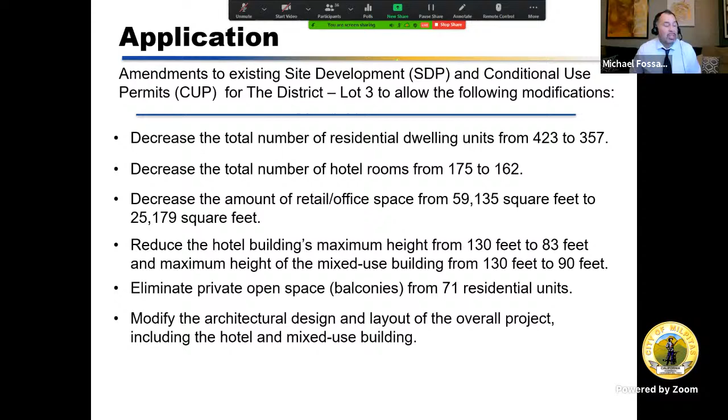This is an aerial image of the Fields site. The Fields is a mixed-use development approximately 15.5 acres in size and will host over 1,000 residential units, 90,000 total square feet of retail space, and a new hotel. The site is located at the intersection of Great Mall Parkway and McCandless Boulevard, directly south of the Great Mall.

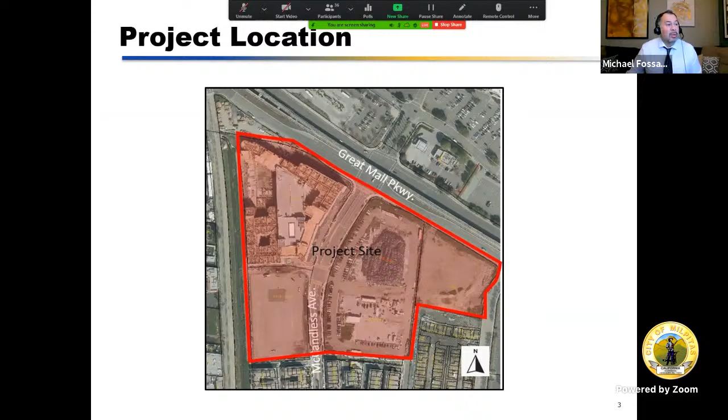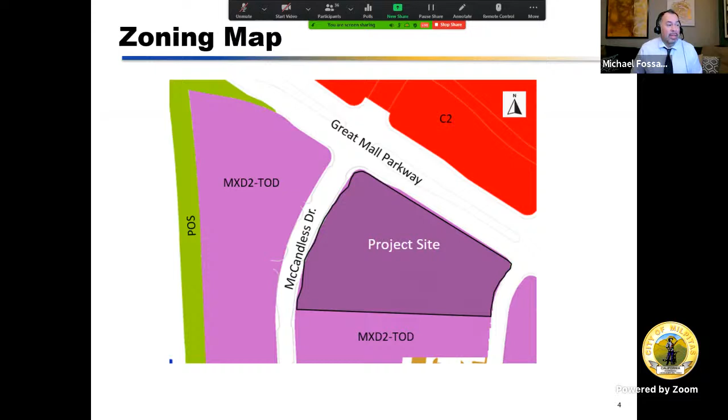This is the zoning map of the property. The project site zoning designation is very high density mixed use with a transit oriented development overlay, also known as MXD2-TOD, identified in purple. The project site is surrounded by general commercial to the north, more commonly known as the Great Mall, shown in red, as well as very high density mixed use development to the east, south, and west, also in purple. The green portion on the left is the east channel of the Penitencia Creek.

The Fields is what many consider a master plan development, with each development area complementing one another to create a high quality pedestrian friendly residential district with retail areas where residents can access personal goods and services. The city refers to the Fields development as District Lots 1 through 4. The developers refer to the Fields as 4 separate entities: Turing, Graham, Elion, and Gideon. The area we'll focus on for the remainder of this presentation is District Lot 3, also known as Elion, in the upper right-hand corner.

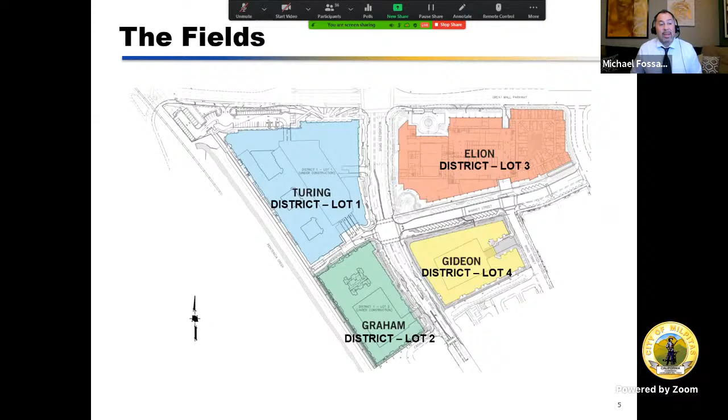The first modification is associated with removal of residential units. As discussed in the staff report, the Fields represents the mixed-use development within the district, made up of 4 separate lots, Districts Lots 1 through 4. In 2015, District Lot 1, also known as Turing, was ready to be developed. The applicant requested to remove District Lot 1 from its 2015 amendment and focus on development of District Lots 2 through 4, as well as townhome developments known as Centerpoint B and C and Huret Court. This is why you don't see the 372 residential units from the District Lot 1 project in the table; all you see is the units from Districts Lot 2 through Lot 4. Therefore, in 2015, the city approved 814 multifamily units specifically within the Fields between Lots 2 and Lot 4.

Between 2015 and today, the developer has submitted multiple applications to decrease units in District Lot 2 and increase units in District Lot 4.

In the city's view, the amount of allowable units never increased over the 814 units approved in 2015. Therefore, the discretion can remain at the Planning Commission level.

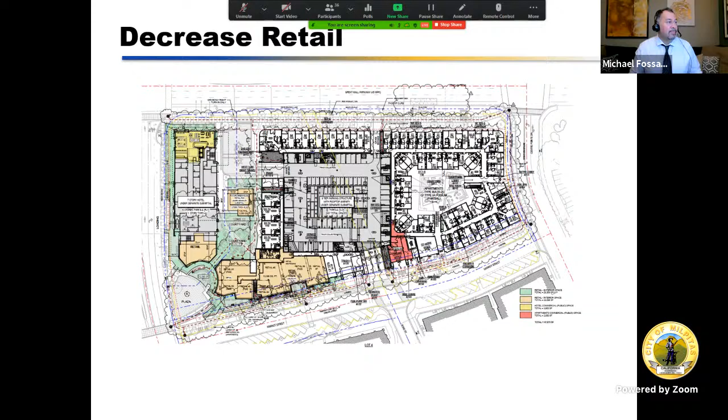In 2015, the project site was approved for a 49,240 square foot amenity area on the top floor. In 2021, the amenity area has reduced to 18,225 square feet. The reduction is allowed per TASP standards because the TASP does not have a requirement for amenity deck size.

TASP requires a total amount of open space, for both public and private. This can be satisfied through what they refer to as a park-in-lieu fee, and since this project is in TASP, it's required to pay a TASP fee. Two-thirds of that park-in-lieu fee is collected via that TASP fee. The remaining one-third of the open space must be provided, or an additional park-in-lieu fee must be collected.

The project has demonstrated compliance with private open space, as the reduced amenity deck is coupled with the ground floor courtyard. The project also includes a public open courtyard, discussed in detail within the staff report. For the record, there is a small label that states beer garden. The beer garden will require a separate conditional use permit prior to approval. This has been noted as condition number 16 within the resolution.

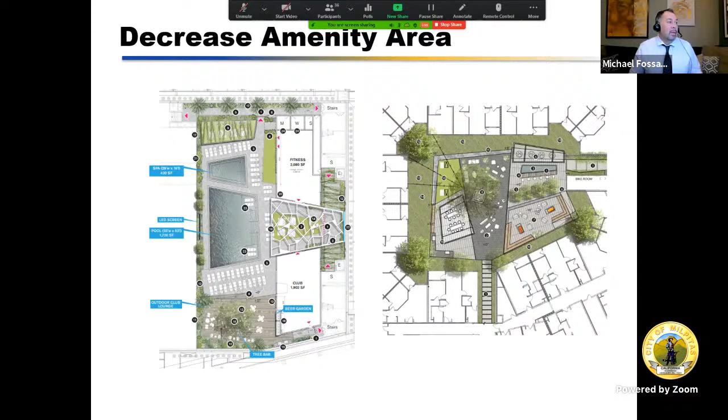This is an exhibit demonstrating the reduced height, showing the mixed-use development and hotel lowering its height from 10 stories to 7 stories. There is no minimum height limit in TASP, and the maximum height limit is 12 stories with a standard approval or 20 stories with a conditional use permit approval. Since the project's height is consistent with TASP standards, as well as complementary to the other mixed-use developments surrounding it, staff is recommending approval for this modification.

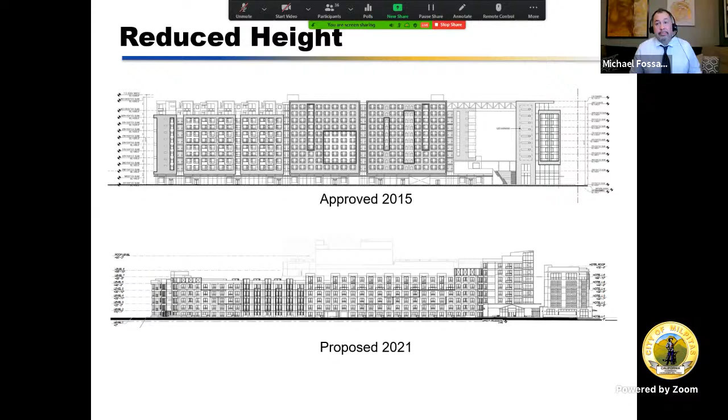The TASP requires that each multifamily residential unit have either 50 square feet of patio, assuming the unit is on the ground floor, or 40 square feet of balcony, assuming the unit is above the ground floor. Therefore, if a developer proposes 357 residential units, they are required per TASP to develop 357 patios and balconies to meet the standard. The applicant has proposed 357 residential units, but has only proposed to develop 286 patios and balconies. Therefore, the applicant has requested another exception as permitted by the TASP.

Within your packet, specifically attachment D, the applicant provides a narrative on why patios were removed. Staff can support the exception due to the additional amenities incorporated into the project, such as a public courtyard, rooftop amenity area, and urban plaza designed into this development. Additional discussion about the proposed exception can be found in detail within the staff report. Next slide, please.

We believe the most obvious change to the site development and conditional use permit amendment has to do with the architecture. The staff report goes into detail about the proposed changes, but since this is a presentation, it's much easier to demonstrate with pictures rather than words. So what we will provide you is images from six different viewpoints.

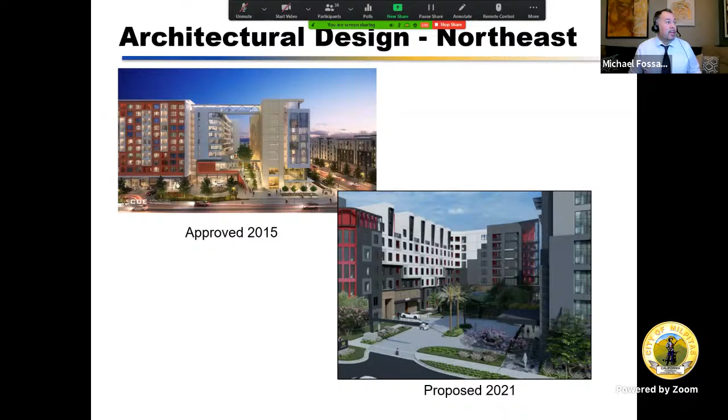This image is the rendering facing Great Mall Parkway with a focus directly on the mixed-use building. Again, imagine you're on the light rail heading southbound towards Montague Expressway, above the street. Both projects have painted plaster exteriors and vehicular access from Great Mall Parkway into the development, but the colors, architectural details, and ground floor use have changed significantly.

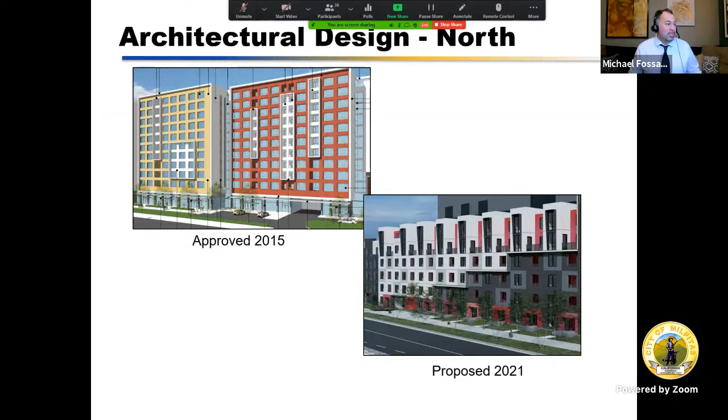As shown, the proposed building has colors that are now black, white, light and dark gray, and red ombre, meaning a very subtle transition of shades of red. Previously, windows were accentuated by square and rectangular projections. Those have been replaced with a stair-step eave that separates the darker units from the lighter units. One major difference between the existing and proposed is the loss of retail along the ground floor, which is replaced with residential units. Next slide, please.

Next slide, please. The following image is a view from the south elevation at Market Street, as if you're standing at Market Street looking at the proposed building. The city doesn't have a rendering of the approved building from its south view, but we do have a rendering of the proposed building, shown in the upper portion of this slide. The proposed design includes the same color palette presented to the north and west.

There are two additional levels of residential built above the ground floor retail and amenity areas, located approximately 160 linear feet from the corner of Centerpoint Drive and Market Street. A second vehicular access entrance and exit is proposed on Market Street, giving two ways of accessing the mixed-use development. Unlike the other slides, we've included a south elevation, which helps better explain how the project is 5 stories near Centerpoint Drive and transitions into a 7-story building with ground floor retail and the hotel near McCandless Drive. Next slide, please.

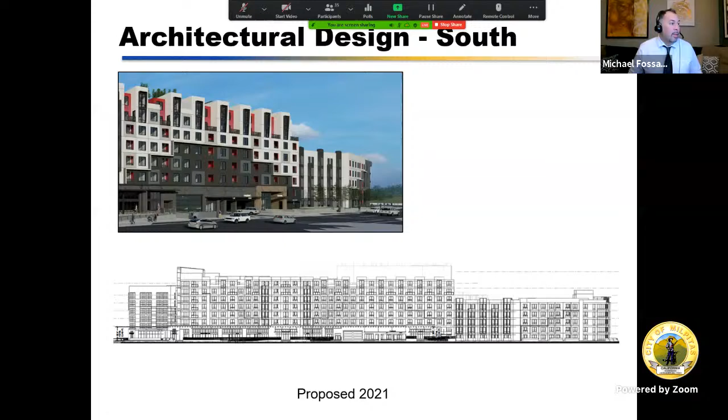This view is looking from the intersection at McCandless Drive and Market Street. The proposed elevation contains a similar sized urban plaza, a cascading water feature, and replaces the previous pond with a large grassy lawn, which also replaces palm trees and paving of the previously approved urban plaza.

The plaza will be multifunctional and can act as a small amphitheater for concerts, a place for outdoor yoga, or simply a place for public gatherings. The urban plaza is the focal point of the field's development and identified in the TASP area as a required open space area. As such, it meets the TASP standards.

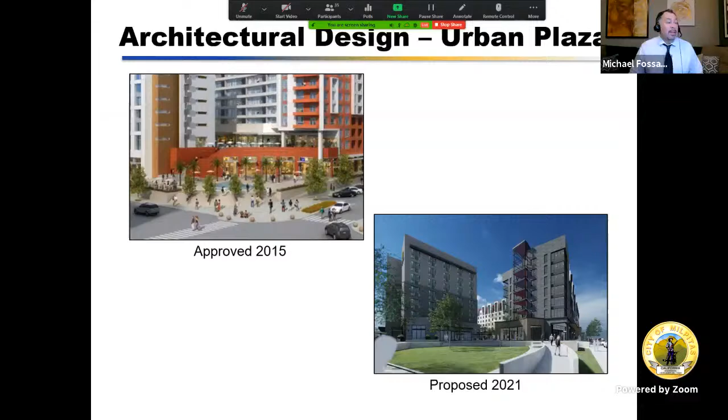The proposed west elevation is a view of the hotel located at the corner of Great Mall Parkway and McCandless Drive. The proposed hotel is 7 stories as compared to 9 stories that was approved. The color of the hotel includes light and dark gray tones, windows with black mullions, and metal awning elements held up by chains coming from the wall.

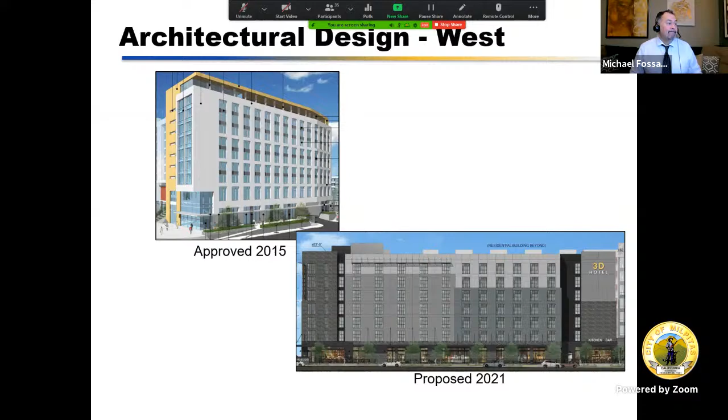As previously discussed, the project meets the standards of the TASP with the exception of retail square footage and private open space. The TASP requires 200 square feet of retail for the minimum residential unit density and either a patio or balcony for each residential unit. If those standards cannot be met, an exception must be approved, which includes appropriate findings be made.

The applicant has proposed to provide a farmer's market on a portion of Market Street to compensate for the reduction in required retail and the removal of private open space from 71 studio units.

Farmers markets will not be permanent, but will likely operate on a weekend morning and at least 1 to 2 nights per week. The applicant will be required to obtain a separate conditional use permit for the farmers market to establish details such as size, location, hours of operation, and security.

The applicant proposes to install the necessary infrastructure, such as electrical outlets and lighting, to support a farmers market during the construction of Lot 3.

Staff supports this public amenity and recommends that it be used to make the required findings for the exception to the TASP standards, as detailed in the staff report.

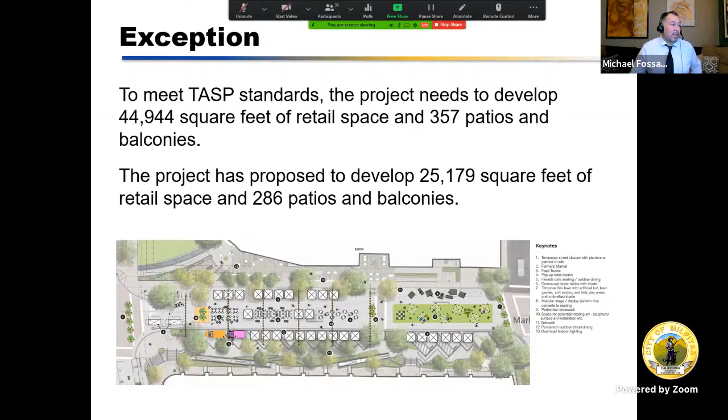Findings have been made in the affirmative for the project for both the site development and conditional use permit amendment. Those findings include demonstrating consistency with the general plan, transit area specific plan, and zoning ordinance, as well as determining the proposed use will not be detrimental to property or improvements in the vicinity, nor public health, safety, or welfare.

Additional findings must be made to permit the exceptions, which includes the exception to meet the design intent identified within the zoning district and or specific plan, and do not detract from the overall architectural, landscaping, and site planning integrity of the proposed development. The exceptions allow for a public benefit not otherwise obtainable through the strict application of the specific standards. Those findings are addressed in detail in both the staff report and the resolution.

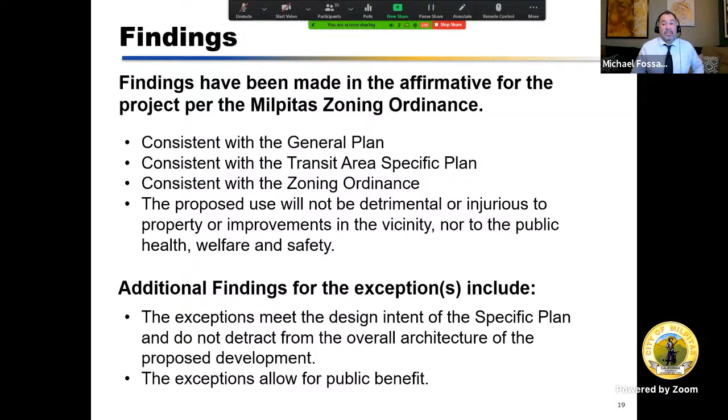The city's CEQA consultant prepared an addendum to the TASP EIR in the form of a memorandum, which is recorded as Exhibit B attached to this resolution. This memo provides an accurate description of the revised project and confirms that the proposed changes will reduce the overall size and intensity of development on Lot 3, and therefore the proposed project will not create any additional environmental impacts not previously analyzed or disclosed.

Staff has also found this project to be exempt from California Environmental Quality Act standard sections 15182 and 15183 of the CEQA guidelines. Next slide, please.

Prior to public notice, the city solicited public comment on the project plans through an online public forum on the city's website. We were unable to host a public meeting. The project plans, project description, and contact information were placed online on January 20th. We're willing to take comments until the day of the meeting, as of today. To date, at least at this moment in time, we haven't received any comments associated with the project.

The project was also noticed with postcards, as well as a notice placed on the Milpitas Post and city website. Next slide, please.

In closing, staff recommends opening and closing the public hearing, considering the memorandum demonstrating consistency with the TASP EIR addendum and added exceptions in accordance with the California Environmental Quality Act, and adopting resolution number 20-022, approving the site development permit amendment SA 20-0004 and conditional use permit amendment number UA 20-0011, subject to the attached conditions of approval. This concludes staff's summary of the project.

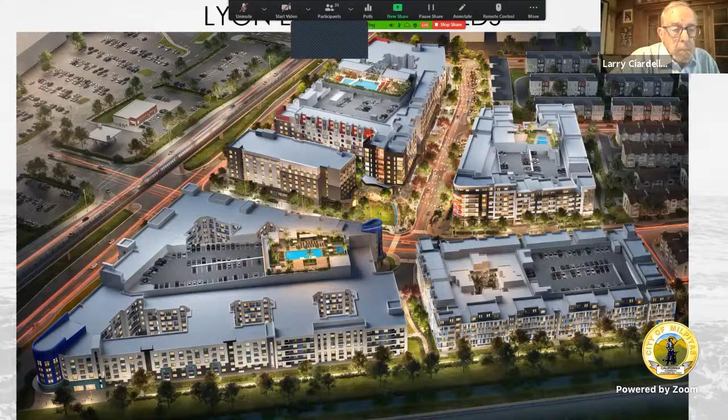Mr. Bull, do you have your audio unmuted? Through the chair, it takes a couple moments to get them online. So if we can, thank you very much, patience.

While the applicant is coming online, the Chair has another question for Mr. Fasadi. The original plan was 814 dwelling units, and currently it's about 777 dwelling units, along with less retail square footage. Does this change the task fee setup, or will we run into shortcomings in the task fee collection? That's a great question. The task fee is based on residential units, so the decrease in units would mean a decrease in task fee, but it may represent a decrease in overall fees. We found that we can compensate if additional units are put somewhere else.

Director Thomas, does that change the calculus for the task areas, the balance of task fee collection for infrastructure changes? Thank you, Chair. Not really. As indicated in the presentation, some of the units decreased on Lot 3 have been transferred over to Lot 4, so overall it's net the same for this project. And as Senior Planner Fasadi indicated...

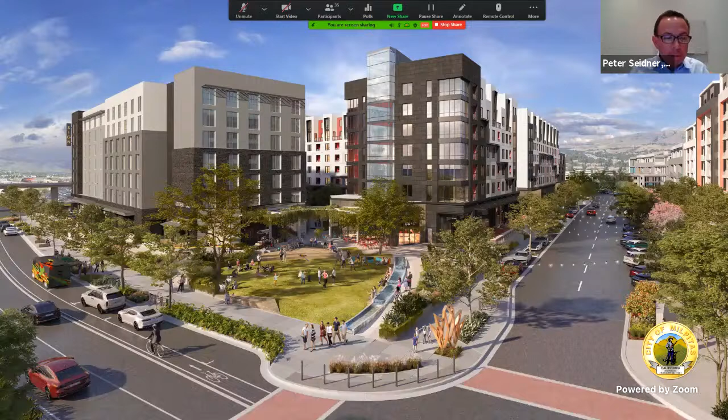So I'd like to start with our public plaza. We're excited that this component of the project is a space that we've designed to be activated, enjoyed, and explored. You can see in the foreground the open lawn - an open space to run and play or relax, but it can also be programmed for outdoor events.

Mr. Bull, can you elaborate on approximately how large is the lawn space? Oh yes, well, the overall plaza is approximately 0.8 of an acre. I didn't have that calculation for the lawn space, but just eyeballing it, it probably goes at least a half an acre. The lawn is 3,500 square feet. Okay, thank you very much.

So I wanted to just show this in plan view, because there's a tiering across our plaza. The buildings are up 3 to 5 feet, a little bit higher than McCandless, and that's due to the floodplain - we have to build that up. So how we've tried to integrate that into our design is we have, at the top, the outdoor seating that is kind of an extension of the retail restaurants. Then we have a next terrace down that, as Michael said in his presentation, can be used as a bandstand for live music acts or perhaps set up an outdoor movie screen.

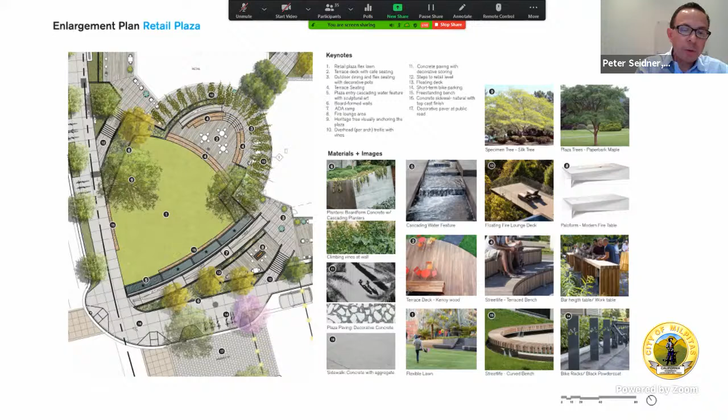Sorry, go back. I also wanted to point out that we've tried to integrate functional features into our design, like the ramp along the bottom of the page to get from the lower McCandless area up to the upper retail area. We've tried to have a little fun with that, with a cascading waterfall alongside it - my kids love to put their hands in water every time they see it, and we hope families in the task area will enjoy this as well. We've also included wood in the seating elements and the deck in order to bring warmth to the industrial modern material palette.

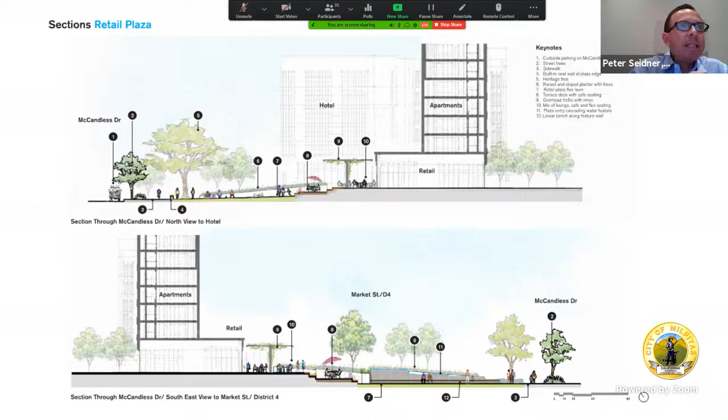Again, this shows a cross-section that shows that terracing effect with the lower lawn, drawing people in off the street to enjoy the space, but also the tiered bandstand or stage, if you will.

And this shows some of the different capacities that we'll have for the different uses, from a lightly used run and play up in the upper left, all the way up to over 400 people for a live music event. Hopefully this pandemic will end soon so we can have things like that.

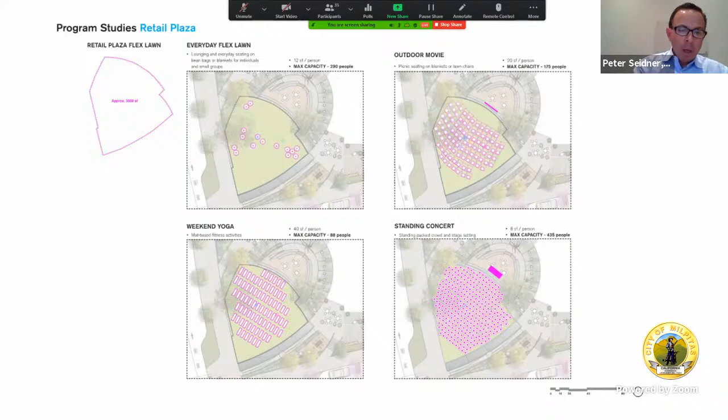Next, I'd like to talk about our Market Street. As Michael indicated, we are excited about being able to close off a section of Market Street for farmers markets. We presented our design to our senior management CEO, Frank Surian, last month, and he was excited. That was the first thing out of his mouth. He said, oh yeah, we can have Wednesday night and Saturday morning farmers markets. So we are excited about that. We've provided the infrastructure such as power, lighting, and sound systems to support the farmers market and other events we may want to have out there.

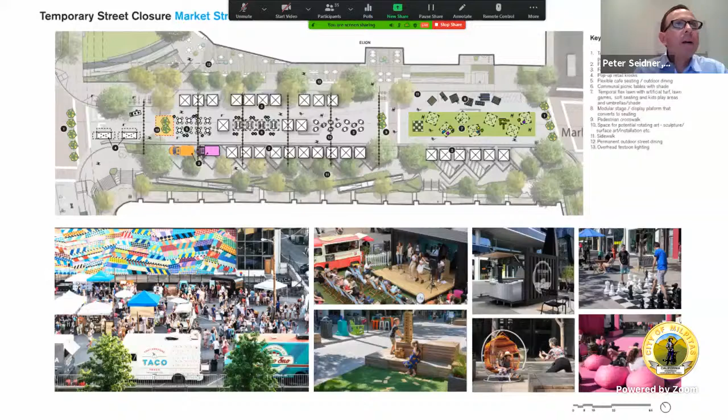Again, just a plan view of what we have in mind. It's basically closing the street from McCandless Drive to Bond Street. Our driveways into the garages are to the right of the page so they wouldn't interfere with this event. And we are, of course, in preliminary discussions with the fire department about this closure.

So I'd like to highlight the Retail Promenade. As I mentioned, due to the need to elevate the building pad to get out of the floodplain, there's a 3 to 5 foot grade differential between the sidewalk and the adjacent promenade that we've built. So in an attempt to alleviate any sort of impediment, we're proposing to widen that upper sidewalk to create a boardwalk experience that's more active than a street side sidewalk. We believe that we can add outdoor dining, seating vignettes, planters, kiosks, and built-in drinking rails just to create an activated urban boardwalk where visitors can stop, relax, and view the activity happening on the street.

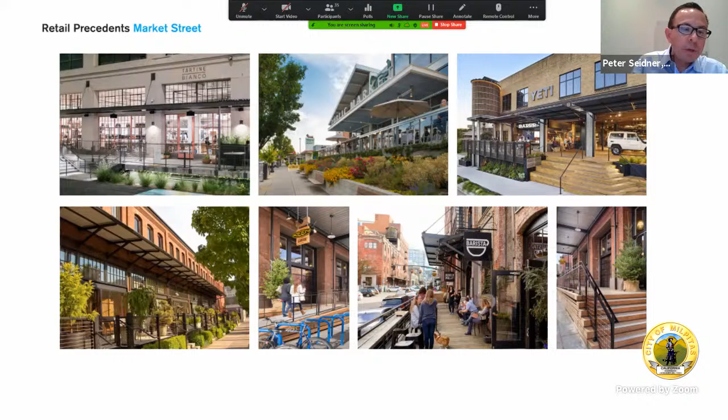Our inspiration is from the Pearl District of Portland, or other warehouse districts where the historic loading docks have been converted to commercial storefronts.

The Greenhouse Courtyard. I wanted to come back to the Plaza to show you how we get there. This is along with our theme of creating a place to enjoy and explore.

When we met with Frank, he was looking at this and said, well, I'm intrigued to see what's going on back there. By that, he meant the area between the two buildings that can be accessed via this passageway between our hotel and apartment buildings.

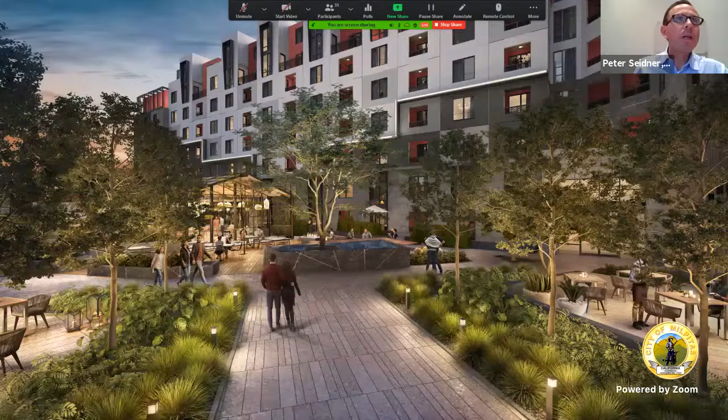That passageway leads to what we call the Greenhouse Courtyard, or sort of a secret garden that's open to the public, and it opens up into just a tranquil garden in between the buildings. You can see an outdoor dining space and some other seating areas, and literally a greenhouse type building that we intend to use as a restaurant, bar, or coffee shop. It's modeled on a cultivation kitchen within the packing district in Anaheim.

The story that we're telling is to create a place distinct from the suburban surroundings. We want people to see Elion and the fields and want to come in and explore and think, just like Frank did, well, what's going on over there? I think I'd like to find out. So the architectural style of the apartment building is what we call industrial tech.

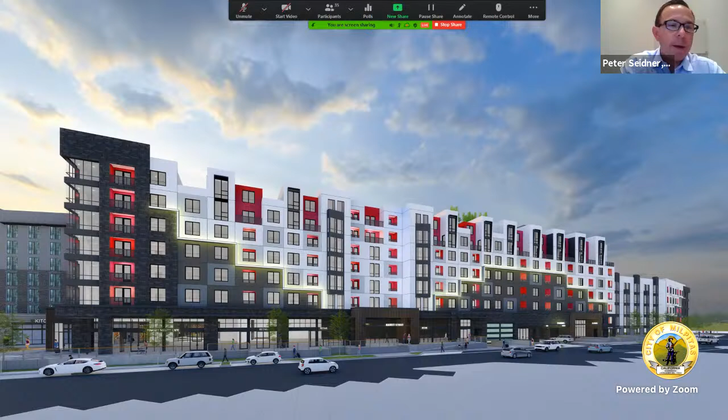Now, working our way around the block, opposite from how Michael's went, is on Market Street. We've articulated the roof line with top floor residential units designed as loft units to create massing interest. The studio units without balconies are on the upper floors, with diagonal, angled bay windows that create interest in the architecture and provide more space inside.

The building massing is further broken down by the use of horizontal metal canopies with accent lighting, steel elements, and metal reveals to accentuate the grid facade. The horizontal metal canopies are staggered to further create movement on the facade.

On Great Mall Parkway, we've tried to create strong corners to bookend the building, with the curved roof parapets accented by steel beams and cross-bracing elements.

Again, you can see it at the westerly end of Great Mall Parkway. The building facade along Great Mall Parkway is urban in character, based on a grid, and its massing and form are derived from and respond to the mass of the elevated VTA rail structure and the design of the rail transit itself.

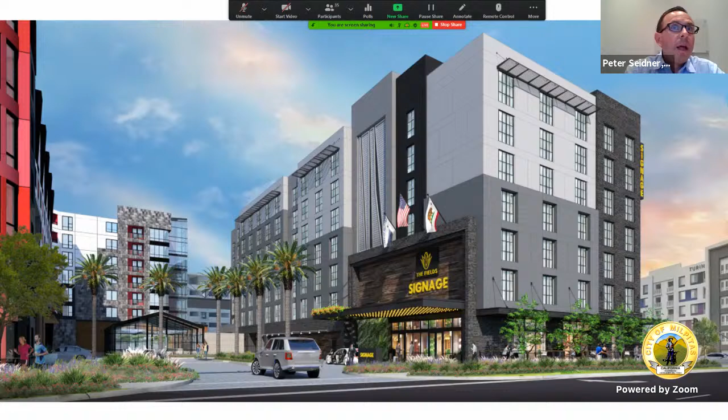This boutique hotel architecture takes on a bold industrial character with a composition of gray tones, gray and black bricks, and black metal artwork accents. The guest rooms are each provided with large windows, creating quality space, views, and natural lighting. It's a boutique hotel that captures the lifestyle of live, work, play, and social networking in Silicon Valley.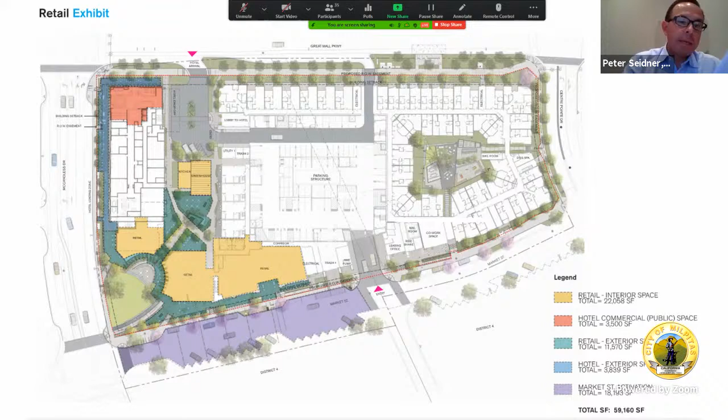The Fields Retail District will provide an outdoor lifestyle experience that is different from, but will complement, the retail offerings at the Great Mall. The indoor-outdoor experience will also help mitigate some of the lasting effects of the pandemic.

Successful retail streets are double-sided, with easy ability for customers to maneuver back and forth across the street between shops. So the retail for both Lyon and Gideon, which is not shown but is right across the street from Lyon, has been focused closer to the corner of Market and McCandless to strengthen the retail experience and create a heart for the district. With that large plaza as a focal point of the community programming, the most active and successful retail will occur at this intersection and the adjacent portion of Market Street.

An additional ground floor retail space not included in the retail calculation is the area shaded in orange at the top of the screen, what we call the hive, or the ground floor of the lobby, which will include a marketplace, a bar, and a coffee shop, providing an additional 3,500 square feet of retail space that is open to the public.

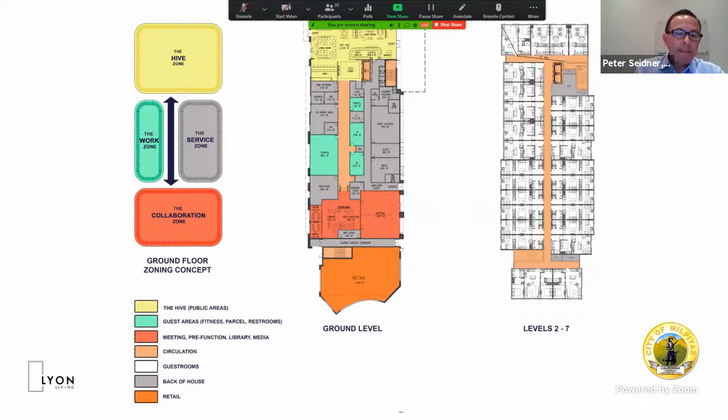We just got our first pass at the concept interior design for that space, and this is what we have before you. You can see on the image on the right, we're going to continue that theme of indoor-outdoor, with indoor-outdoor promenades and patios on Great Mall Parkway wrapping around with McCandless.

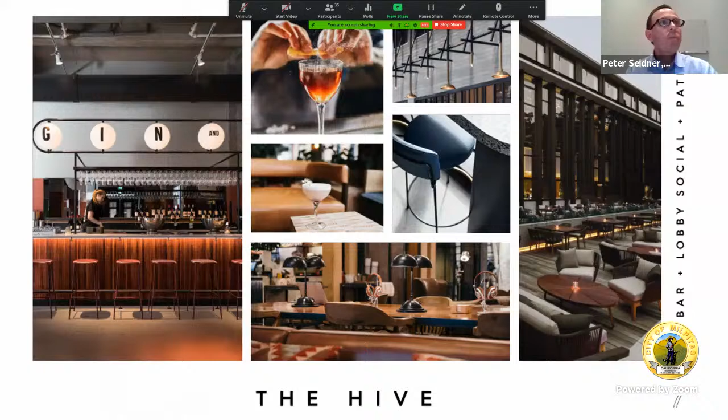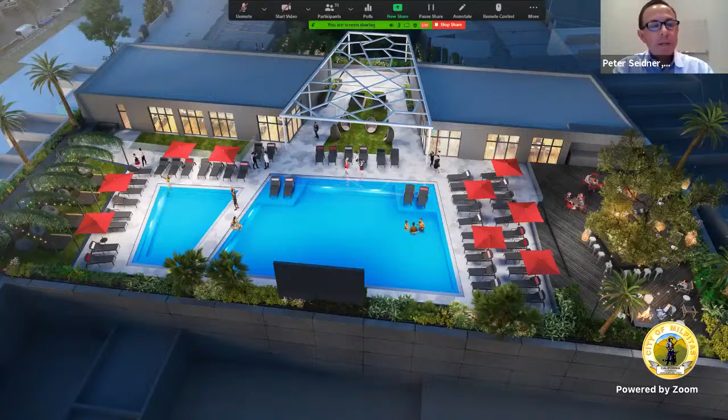As far as the balconies, as Michael indicated, all of our one, two, and three bedrooms have balconies. All of our ground floor studios have patios. The upper floor studios use angled bay windows to create architectural interest, which also provides more square footage within the studios themselves.

But at Lyon we think we more than make up for that shortcoming with our generous amenity package. This is our Lyon Living signature rooftop deck, 20,000 square feet, featuring a pool, large screen television, spa, a 2,000-foot fitness center, a 2,000-foot club room, and a beer garden. All of these spaces also feature indoor-outdoor components.

We also have another 9,000 square foot ground level courtyard in the middle of the building that'll be heavily programmed with barbecues, seating areas, fire pits, another spa, game areas, and dining areas for our residents to enjoy.

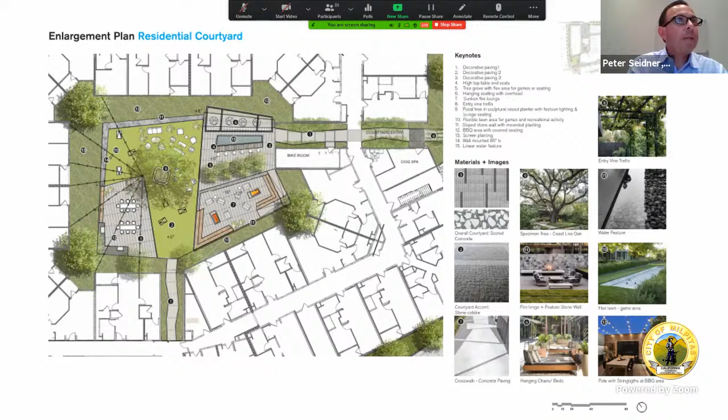In addition, at the end of Market Street, at the retail district, we have our leasing office, but also a 2,000 square foot co-working area, including a mezzanine, with communal work tables, private conference rooms, and private office spaces, all heavily programmed with Wi-Fi and connection ports for our residents to enjoy.

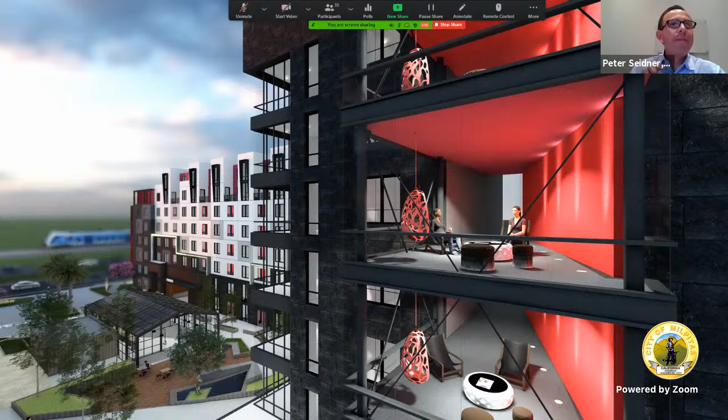One final amenity continues our theme of creating design features out of function. The iconic tower at the corner of the plaza serves as a terminus to the residential corridors within the building, creating 200 square foot spaces on each level. It'll be furnished with seating areas for residents to enjoy and take in the wonderful views to the west of the mountains, the bay, the courtyard below, or just enjoy the sun coming into this area of the building.

Next slide please. So we'd like to...

You have lost audio. Audio is lost to the speaker. There's no audio. Audio for the last minute or so, I was lost. We have an audio issue.

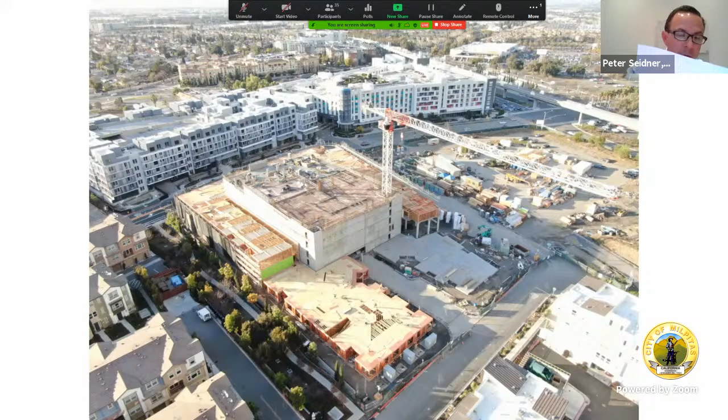So I'd like to reiterate, Lyon's commitment going forward is to complete the city's vision for the TASP by creating a destination, not just for Lyon residents, but also for the residents of the TASP, the city and the region. Our project is compliant with the number of apartments, number of hotel rooms, public spaces, and retail to the original entitlement.

It also comes with the public benefits contemplated in the original entitlement. We are providing a nearly one acre public plaza, a $500,000 contribution toward the rapid response vehicle for the fire department, and a shuttle system operating out of the hotel to and from the BART station, also available to other residents of the TASP. Lyon's new design goes above and beyond the original approval with an improved design and an activated community.

So our team is here, our Lyon team. I also have our designers, Steve Gaffney with Architects Orange, Clarissa Chung with Studio 111, our landscape architect, and Brian Watson, our interior designer who also designs our colors and materials, who are available along with Lyon personnel to answer any questions from the Planning Commission.